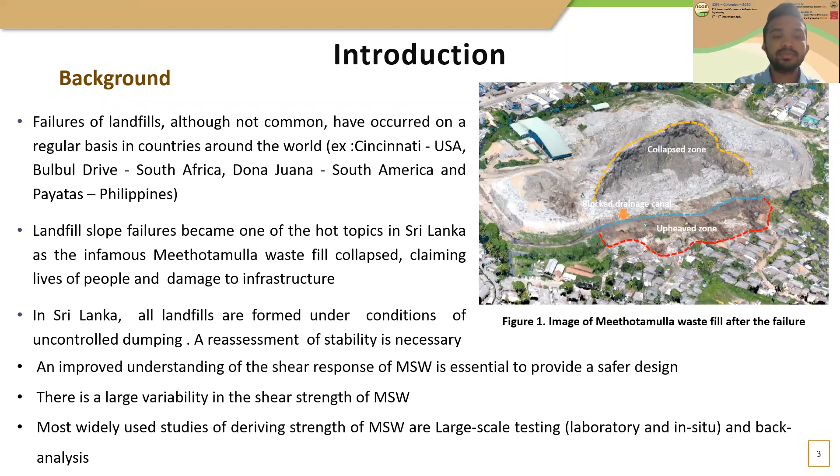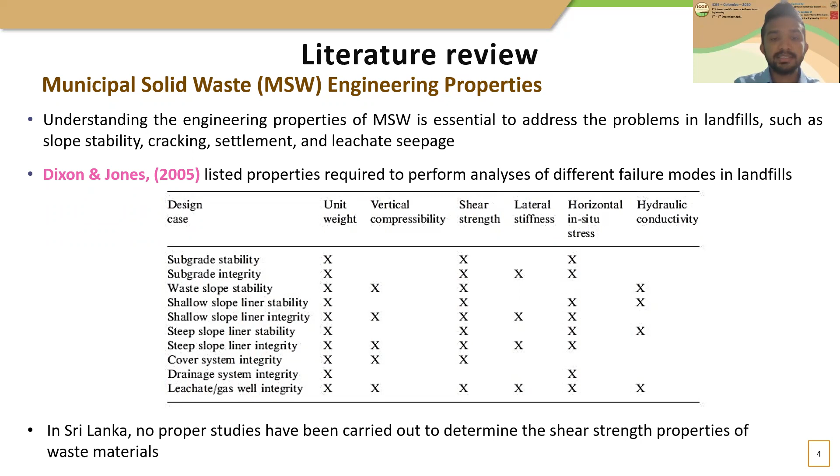Now I will give some understanding of past studies carried out with respect to shear strength testing on waste materials. As shown in this figure, Dixon and Jones highlighted that out of many engineering properties, shear strength of MSW can be a vital property for many design cases.

Fassett et al. emphasized three main factors contributing to the shear strength of MSW: number one, the organic content and fiber content; number two, the age of the waste and the extent to which it has decomposed; number three, the placement conditions.

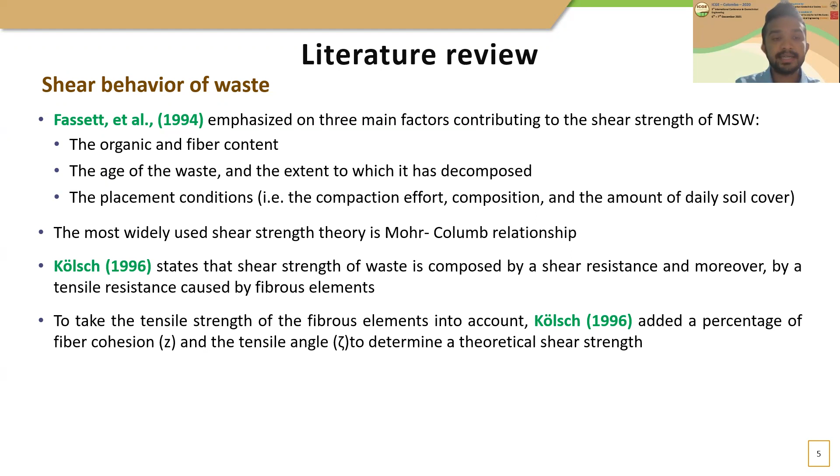The most widely used shear strength theory in MSW testing is the Mohr-Coulomb relationship. To take the tensile strength of fibrous elements into account, Kolsch added a percentage of fiber cohesion and tensile angle to determine a theoretical shear strength.

As shown in this table, there are three main ways of determining shear properties in the literature: back analysis, lab testing, and in-situ testing. It is summarized that each of these methods has its own advantages and disadvantages.

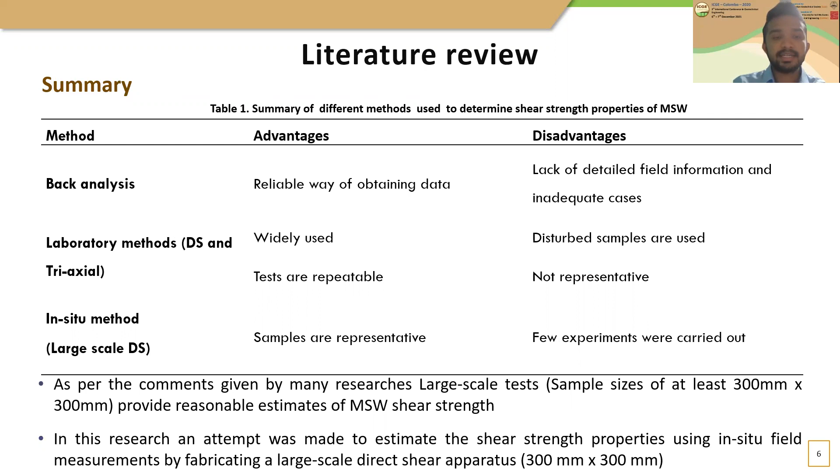In this research, an attempt was made to estimate shear strength properties using in-situ field measurement by fabricating a large-scale direct shear apparatus. Now I will move into my research objectives and steps followed.

The main objective of this research is to fabricate a large-scale direct shear test apparatus to determine the shear strength properties of MSW at the Meethotamulla waste fill site. Here are the steps I followed in the study, which I will describe in turn in the next few slides.

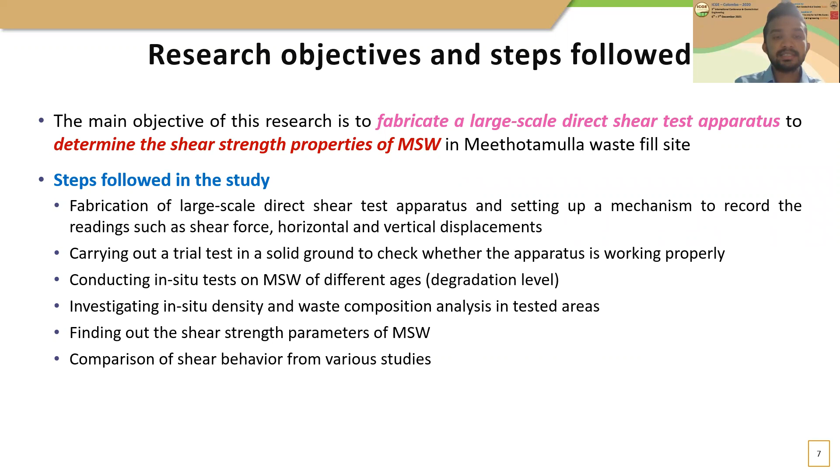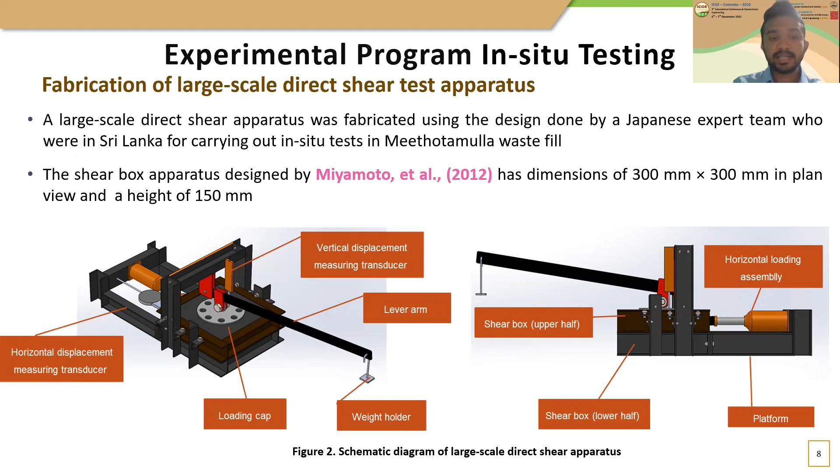Number one is fabrication of the large-scale direct shear test apparatus. The apparatus shown here was designed by Miyamoto et al. It has dimensions of 300 mm by 300 mm in plan view and 150 mm in height. They shared the specification with us during their visit to Sri Lanka after the Meethotamulla failure.

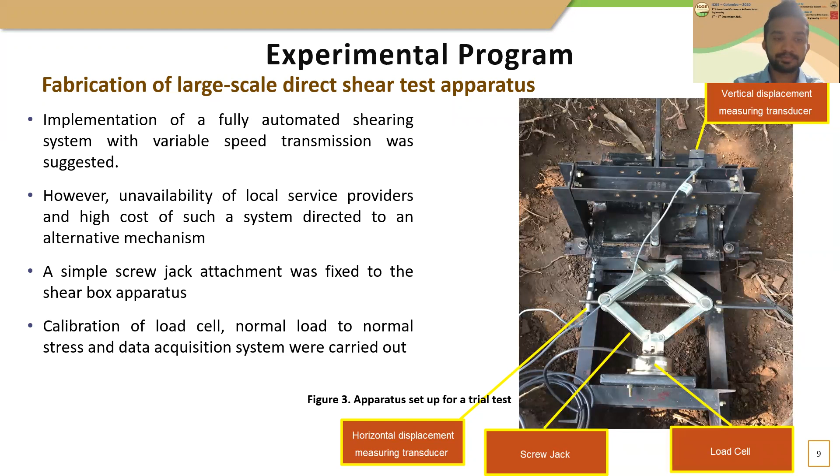Afterwards, we planned our tests on 4 different degradation levels. In the absence of collection data, it was assumed that different heights on the waste mound would give different degradation levels. Accordingly, 4 tests were conducted at 26 meters, 22 meters, 14 meters, and 7 meters.

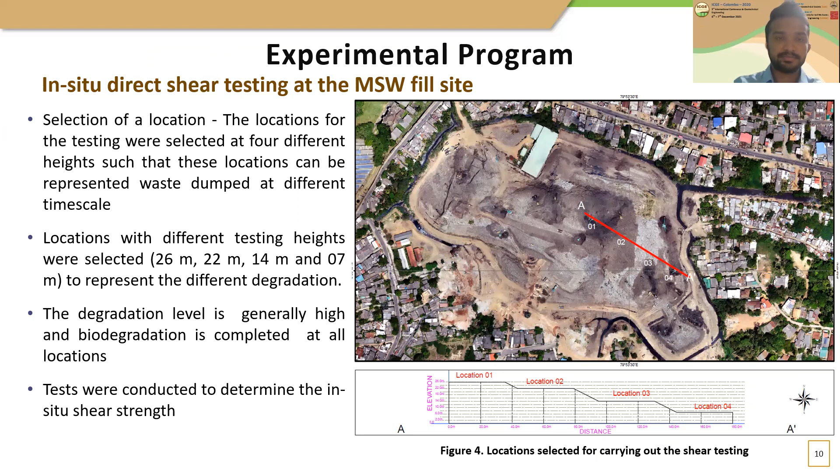After those 4 locations, we carried out waste composition analysis at those locations. As this table shows, we carried out the framework proposed by Dixon and Langer.

There are no significant variations of materials at different locations, and this may be due to the ad hoc nature of the waste dumping system practiced at the site. Further, biodegradable items were not found at the time the tests were carried out.

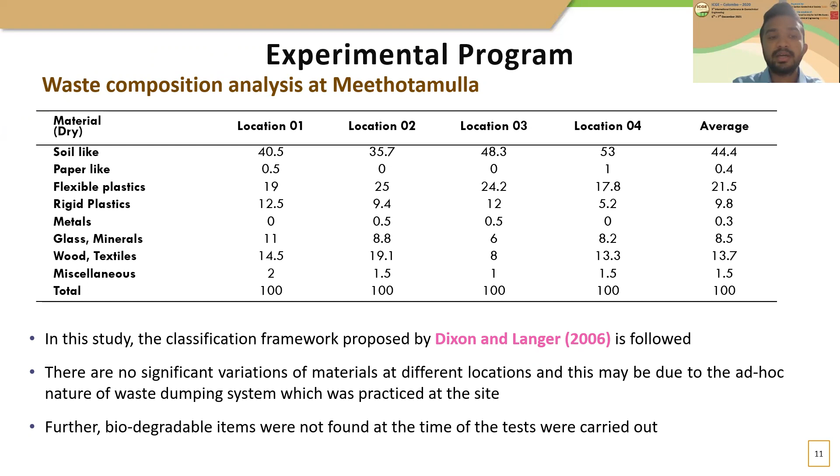Now I will move on to the experimental program carried out at the site.

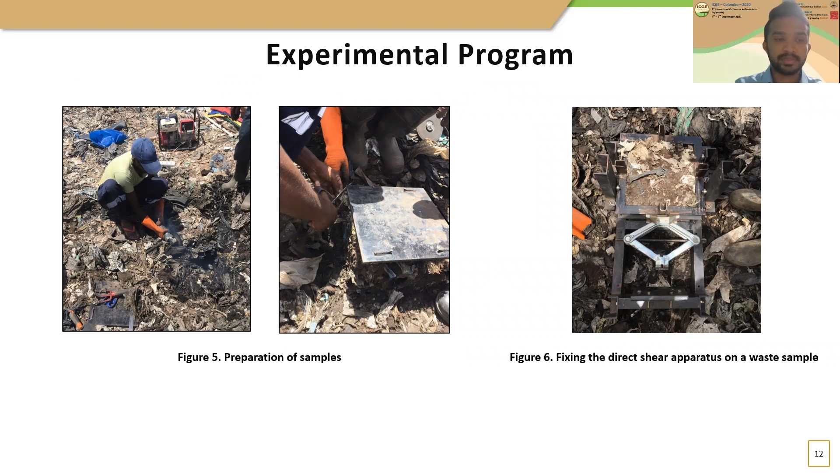The in-situ testing program was started with sample preparation. After the sample was successfully prepared, the shear apparatus was placed very carefully without harming the sample. Then we applied the normal load and kept it for some time until we saw no vertical deformation on the sample. Afterward, shear load is applied using this jack.

Rate of shearing was maintained around 1 millimeter per minute. However, the shear rate could not be kept exactly at 1 millimeter per minute as a consequence of the manual controlling system. Then the sample is sheared until the shear displacement reaches 45 millimeters.

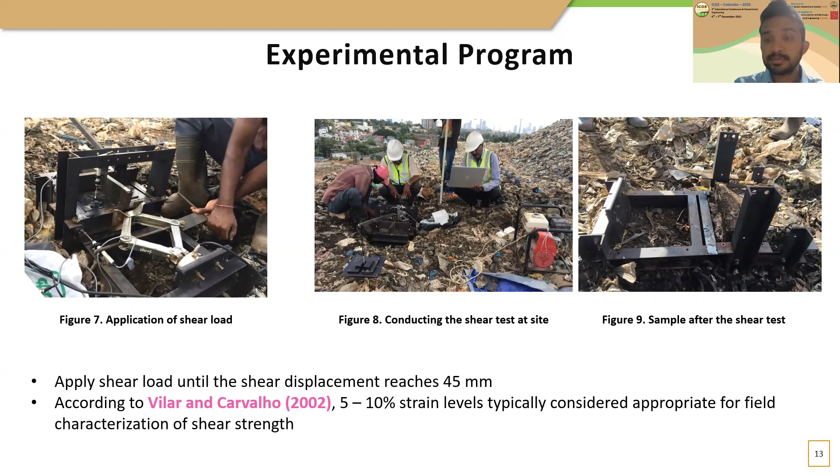Now I will move on to the results of the in-situ testing. The tests were performed under the conditions of 3 different normal stresses: 10, 20, and 25 kilopascals. These curves exhibit similar behavior where none of the curves has an identifiable peak position. We observed a parallel increase of shear stress over displacement, as suggested by many researchers.

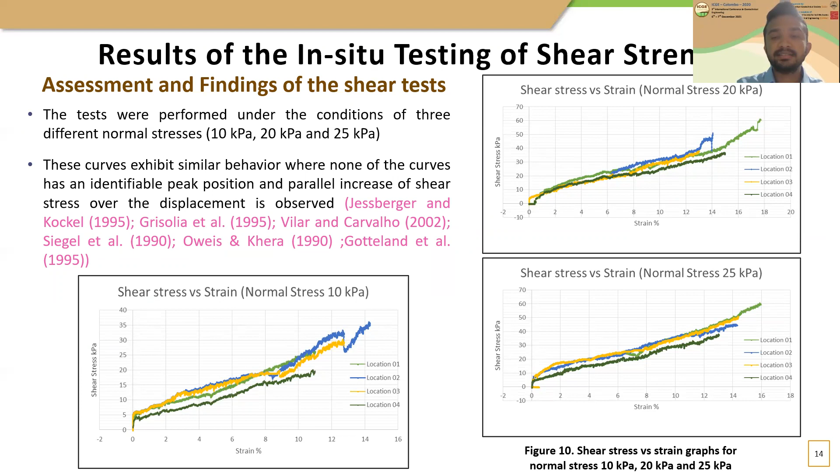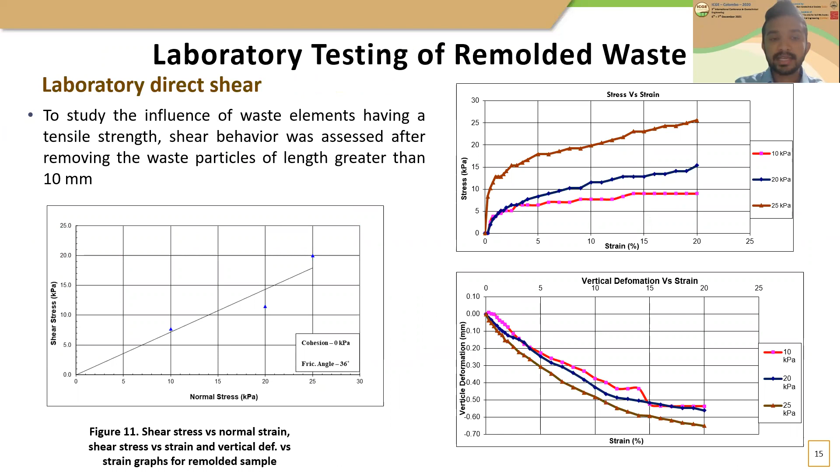After the in-situ tests, an attempt was made to observe the shear behavior after removing the waste particles greater than 10 mm in laboratory conditions. That is, shear tests were carried out on remolded samples, and here are the results of those.

Now I would like to talk about the findings of these shear tests. The mobilized shear angle is in the range of 36 to 39 degrees for both in-situ and laboratory tests. Mobilized cohesion is 16 kilopascals for location 1, 2, and 3, and the cohesion value for location 4 is 9 kilopascals.

However, there is no cohesion in the laboratory test sample. This may be as a result of removing the lengthy particles.

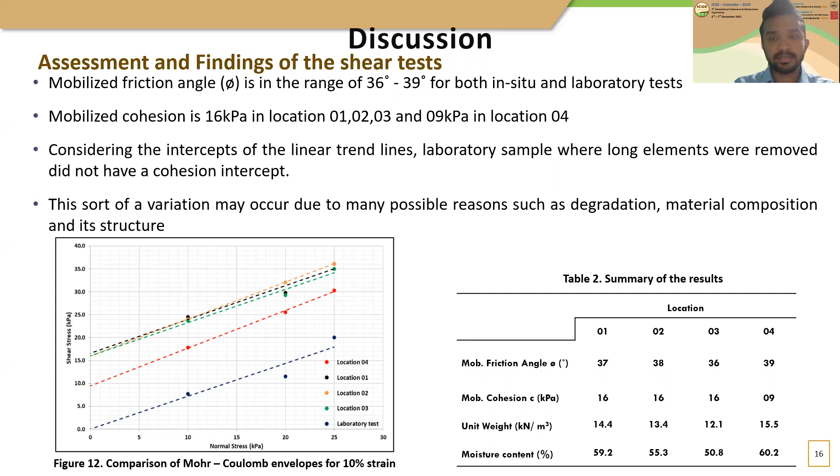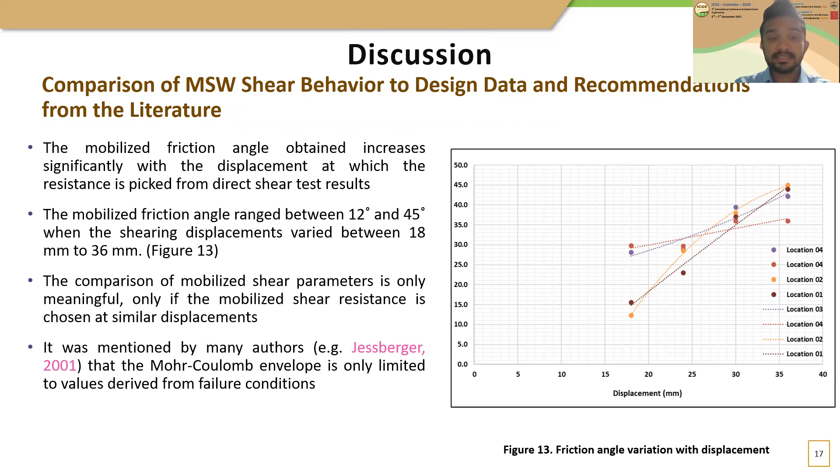Now I'll move to more discussion on my tests. This figure shows the variation of friction angle with shear displacement. As you can see, the mobilized friction angle ranged between 12 degrees to 45 degrees when the shearing displacement varied between 18 millimeters to 36 millimeters. Therefore, it is quite vital to have a limiting condition to shear stress properties when it comes to designing landfills.

Here, the results obtained from the in-situ direct shear test were plotted on the graph suggested by Manassero et al. The result obtained in this study does not match with the trend line in zone A, which represents applied normal stress below 20 kilopascal. As 25 kilopascal was the maximum applied normal stress used in this test, a validated prediction cannot be done for zone B and C.

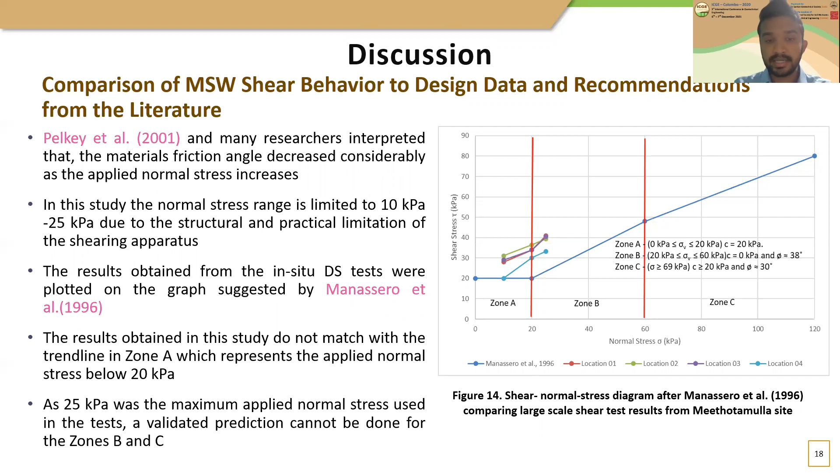Now I will move into the conclusions of my study. A large-scale direct shear apparatus was fabricated and shear strength properties of MSW at Meethotamulla waste fill site was studied. To assess the shear behavior, samples were selected at 4 different heights, representing differently aged locations in Meethotamulla. However, it was determined that the 4 different locations have more or less similar waste constituents. The normal loads applied in these tests were 10 kilopascal, 20 kilopascal, and 25 kilopascal.

A peak failure state was not observed in any of these tests. Therefore, 10% strain was considered to define the Mohr-Coulomb envelope. However, it is a much needed requirement to do the shear test for higher normal stress values with a mechanism to measure the normal stress applied to the system.

The results obtained from the in-situ direct shear test on MSW are in line with some of the previously published data while contradicting some research findings as well. More repetitive tests and results are needed to make strong agreement with the already published data.